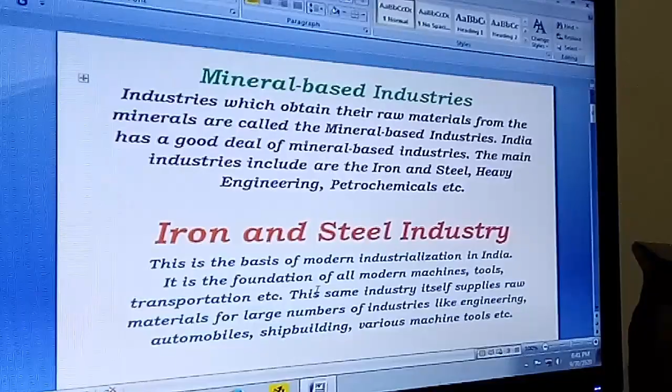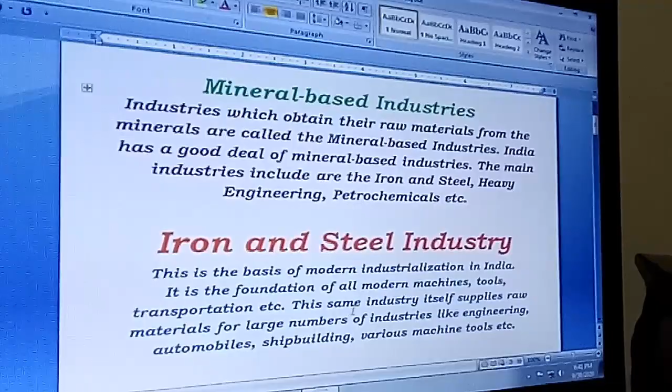This is the basis of modern industrialization in India. If India is progressing, becoming a developed rather than developing country, then iron and steel is the basis, the foundation of all modern industrialization in India. It is the foundation of all modern machines, tools, transportation, etc.

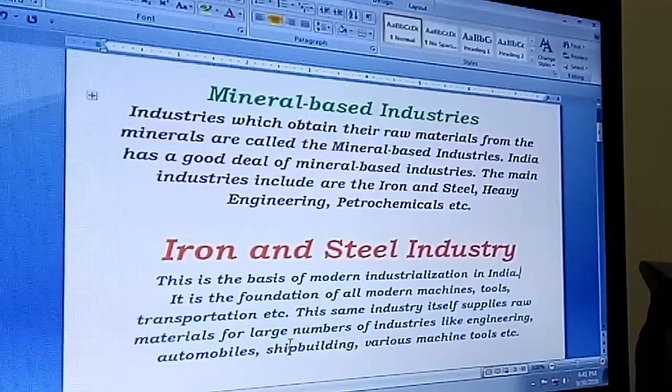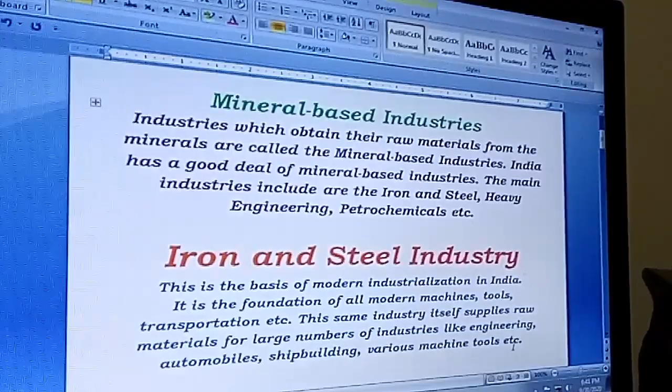The same industry supplies raw materials for large numbers of industries like engineering, automobiles, shipbuilding, various machines and tools. Iron and steel industry takes its raw material from minerals, but iron and steel itself becomes raw material or resource for so many other industries. So many industries survive because of the iron and steel industry, mainly engineering, automobiles, and shipbuilding.

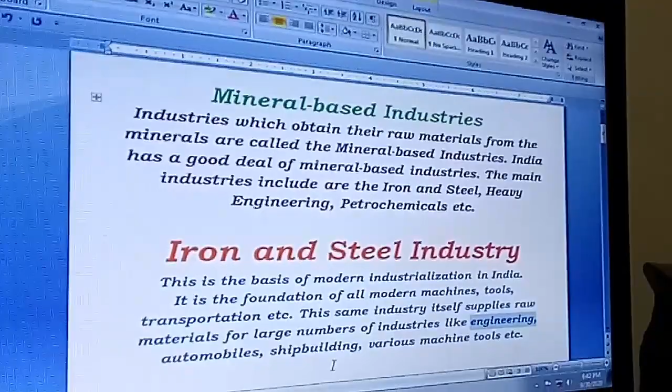See, aeroplane body is of course made from aluminium and some other materials, but various machines and tools are all made from iron and steel.

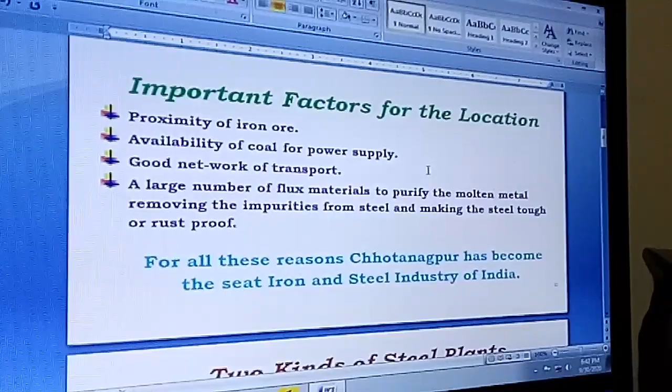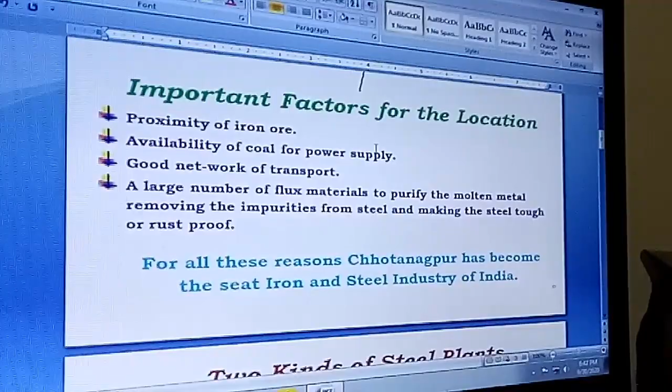Now, which are the important factors to locate an industrial place? Like proximity of iron ore - if you have to set up an iron factory or industry, what you are supposed to see first is proximity of iron ore, that means how close the iron ore is. That is the basic mineral.

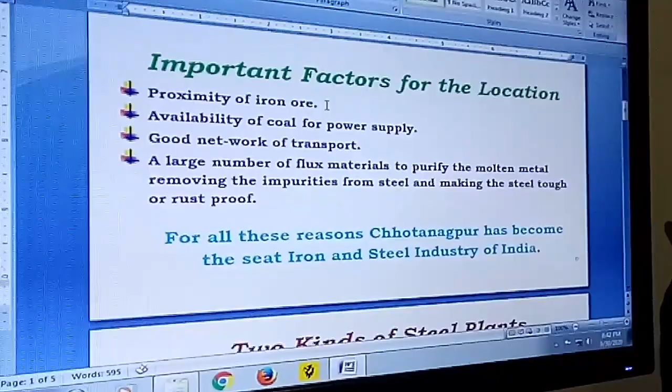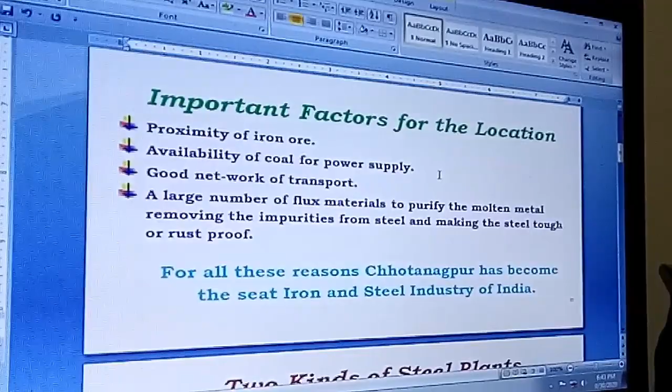Availability of coal for power supply is important, because the iron ore has to be melted. A good amount of coal is required to create the fire, the temperature to melt the iron ore. Also needed: a good network of transport and a large number of flux materials.

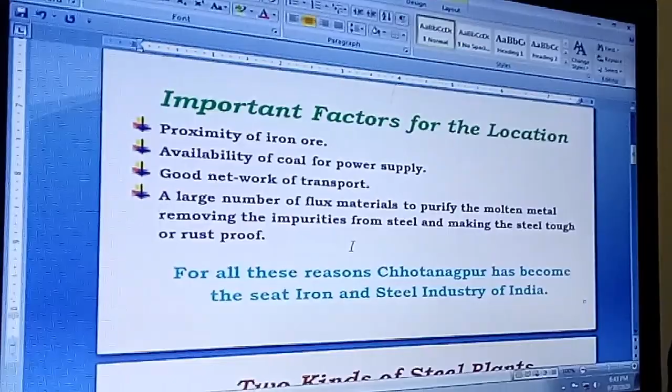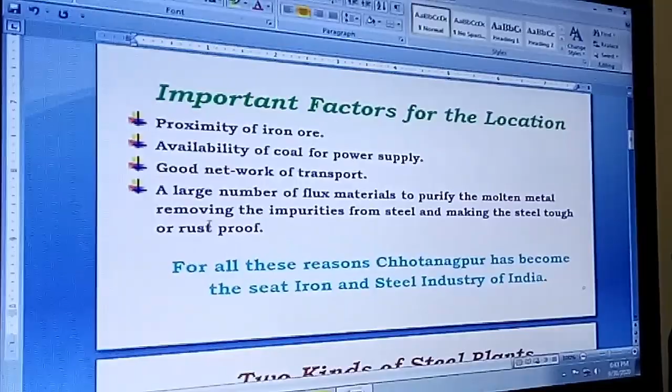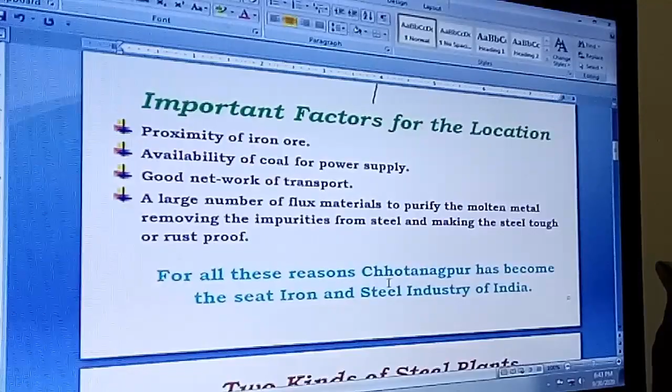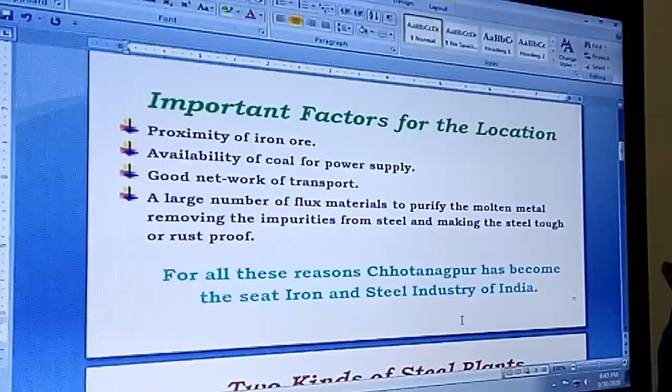In iron and steel, not just the iron ore, but so many other subordinate supportive materials are also needed, either to purify the molten metal, remove impurities from the steel, or make the steel tough or rust proof. For these reasons, in India, Chhotanagpur has become the seat of the iron and steel industry of India. It doesn't mean this is the only place, but the major, primary iron and steel industry of India is situated within the Chhotanagpur belt.

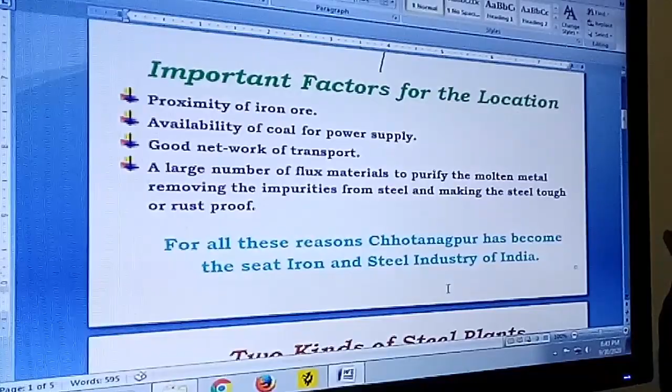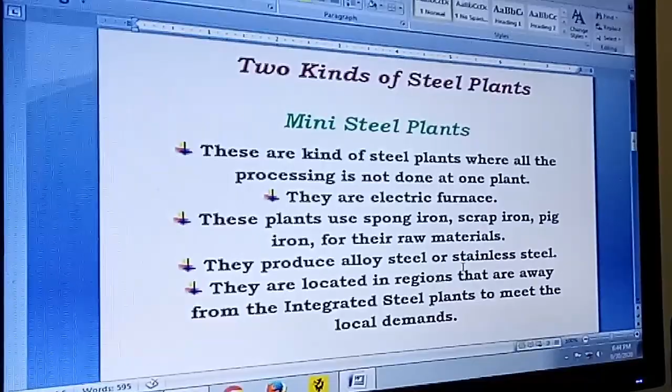Now there are two kinds of steel plants. One of them is known as the mini steel plant. What is a mini steel plant? These are steel plants where all the processing is not done under one plant or under one roof - they use an electric furnace.

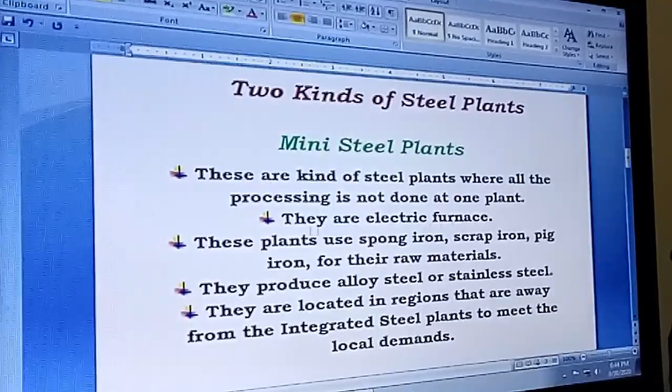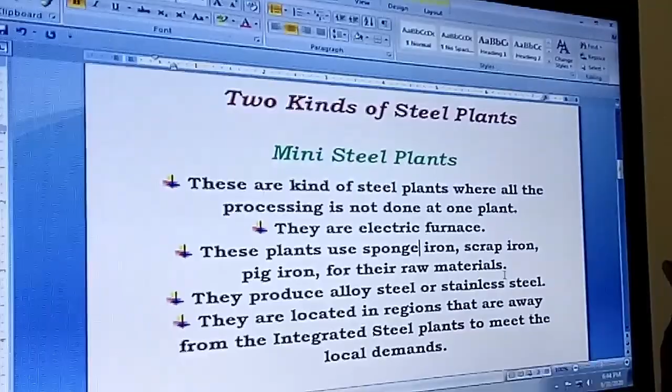These plants use sponge iron, scrap iron, pig iron as their raw materials. Remember, sponge iron, not ore. These raw materials - sponge iron, scrap iron, pig iron - are the second form, already reformed from the iron ore.

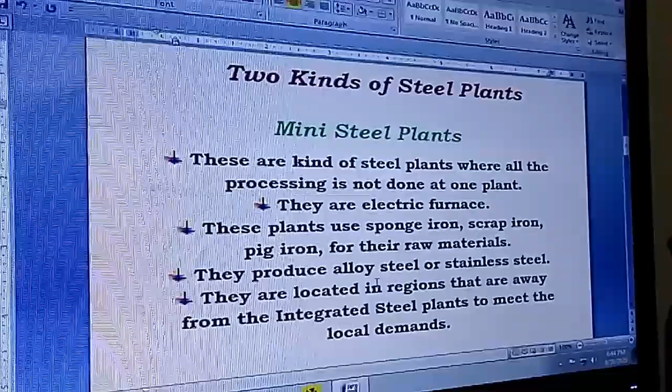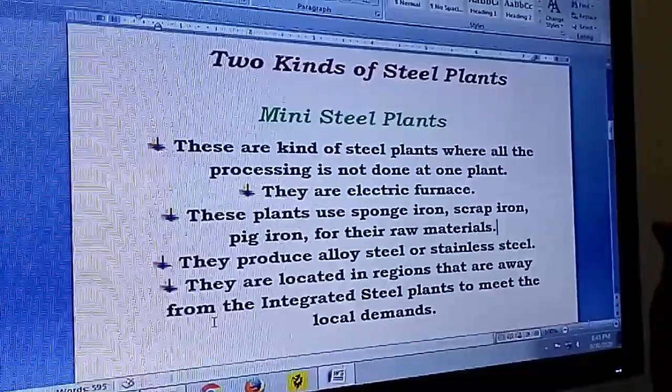They produce alloy steel or stainless steel. They are located in regions far away from the integrated steel plants. In fact there are two kinds of steel plants - mini steel plants and integrated steel plants. We will discuss the latter after this.

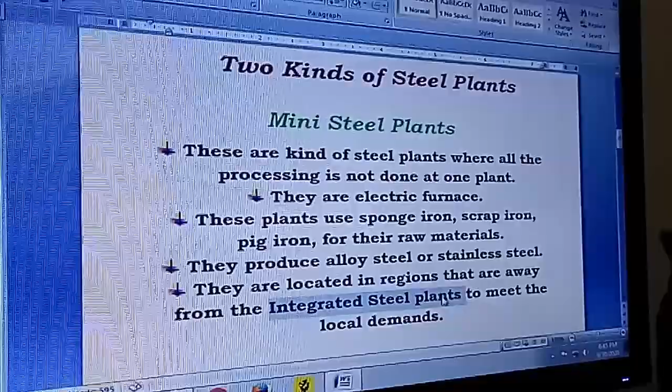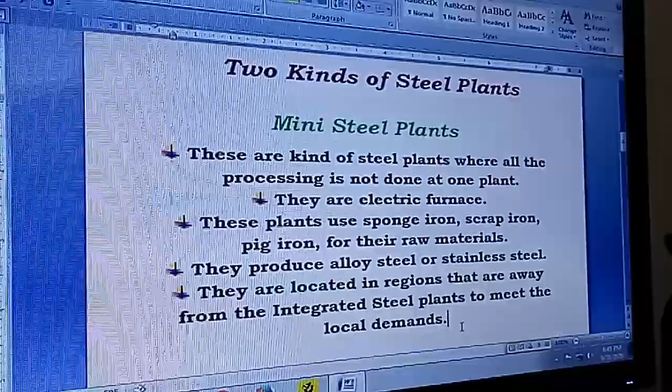To meet local demands, mini steel plants are situated in areas where the local demand will be met, like stainless steel used for vessels, etc.

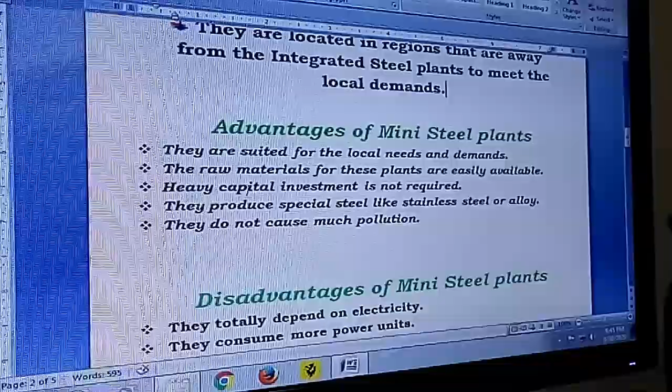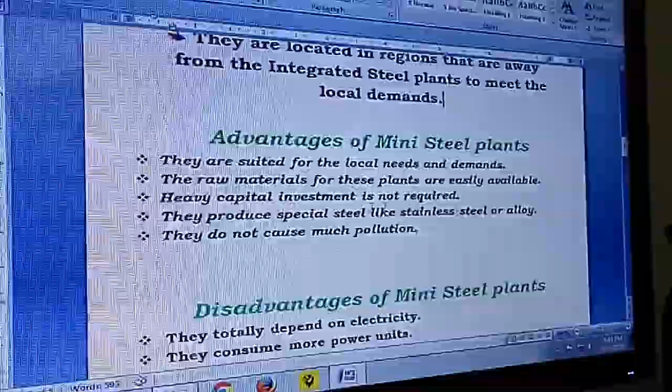Now, advantages of mini steel plants in India: they are suited for local needs and demands, the raw materials for these plants are easily available, heavy capital investment is not required, and they produce special steel like stainless steel or alloy steel.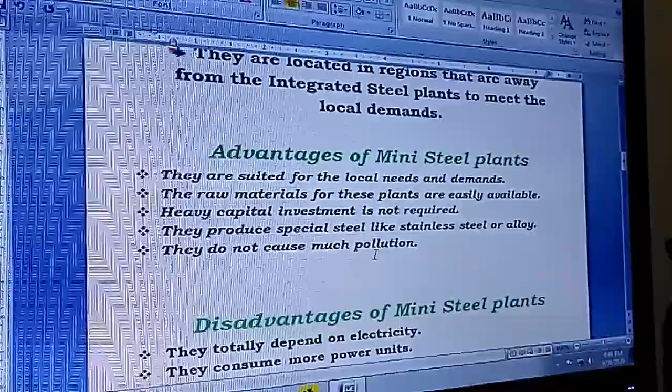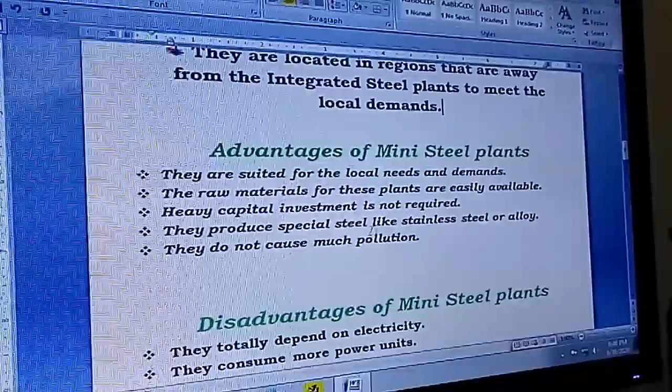They do not cause much pollution - remember the heat energy they use is from electricity, so therefore they do not cause much pollution. Besides, they use the raw material, and this is a finished product.

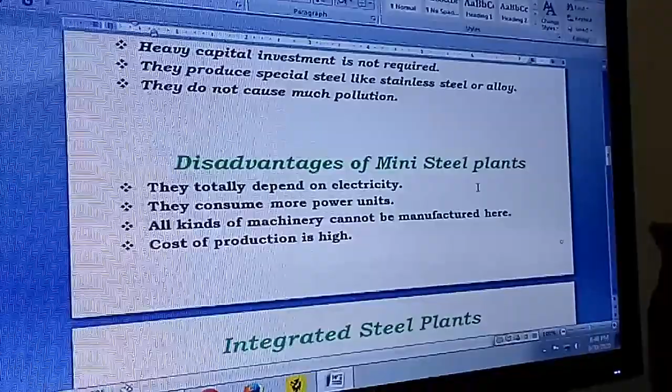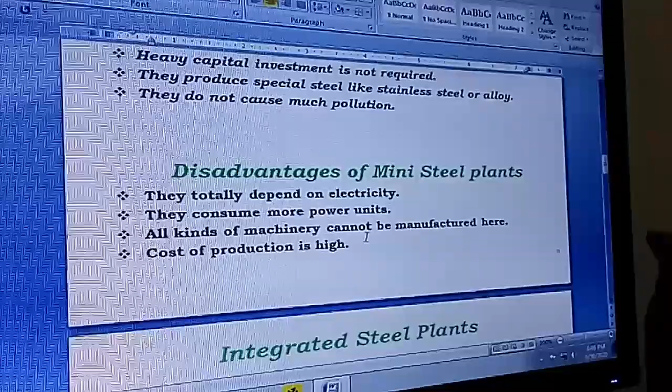Now, disadvantages of the mini steel plant: they totally depend on electricity, they consume more power units, and all kinds of machinery cannot be manufactured here since its name is mini, small. Also, cost of production is actually high.

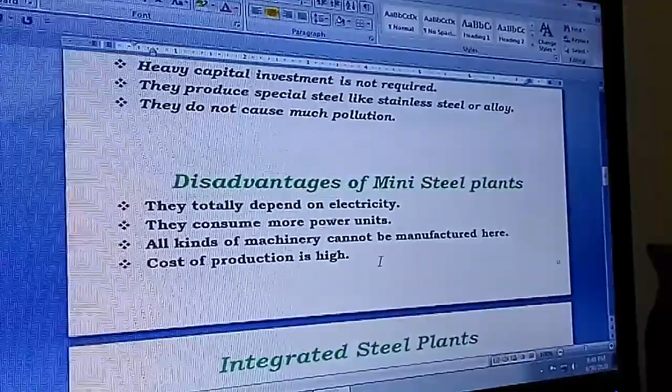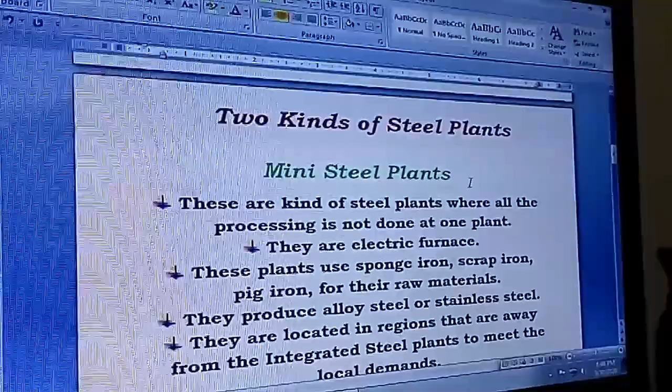The total cost of production is not high, but the cost of production per unit is quite high. Now, against these mini steel plants, there is another bigger one called the integrated steel plant. These are plants where all the processes are carried out under one complex, meaning the work goes from melting of the iron ore to shaping of the metal by rolling.

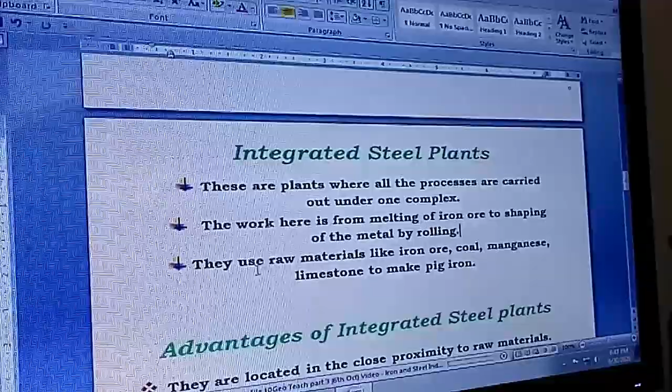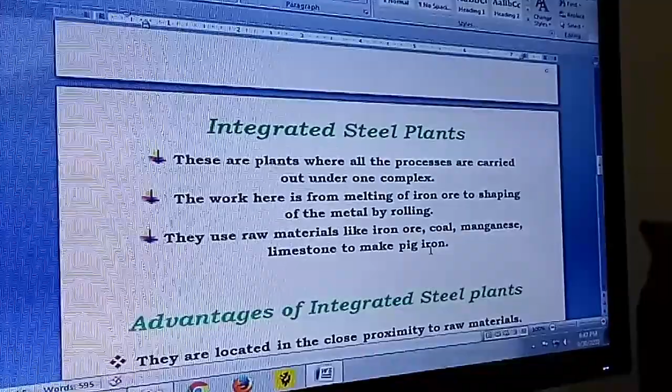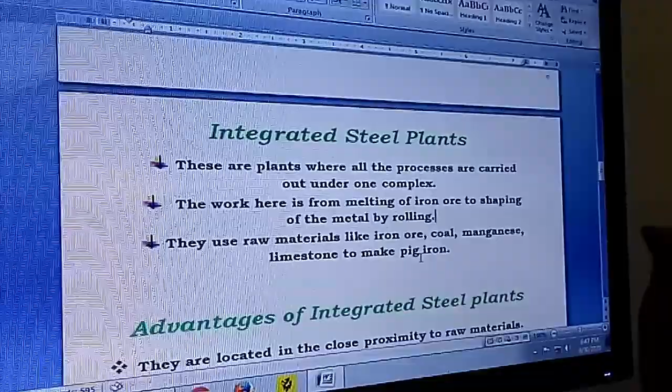From A to Z, from melting of the iron ore to the metal by rolling, they use raw materials like iron ore, coal, manganese, limestone to make pig iron, sponge iron, scrap iron, etc. They don't use the finished product.

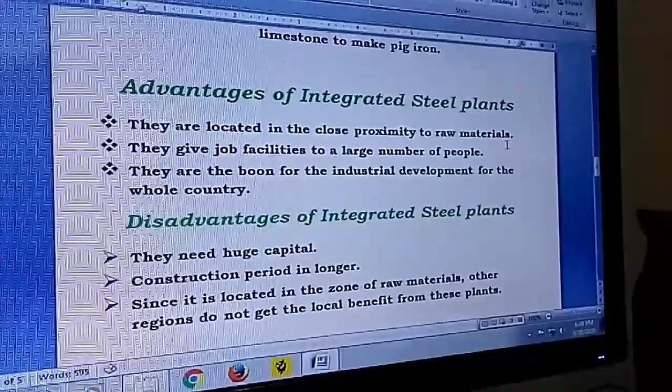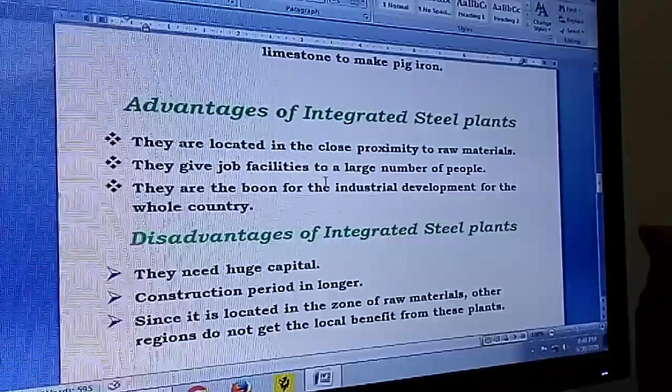Advantages of integrated steel plants: they are located in close proximity to raw materials, close to the mines of iron ore, etc. They give job facilities to a large number of people because integrated is a huge complex.

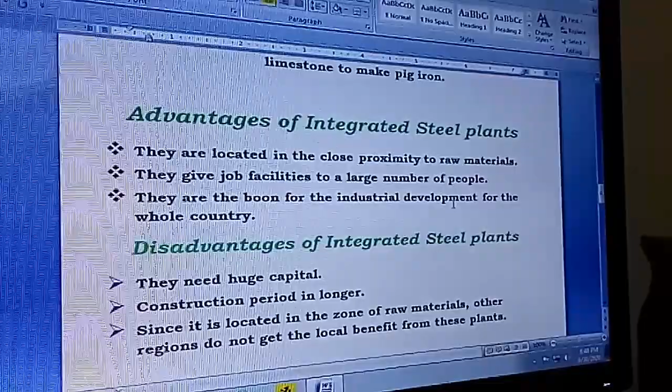They are a boon for the industrial development of the whole country. These are the backbone of the whole country. Our foreign currency earning from exports comes mainly from these integrated steel plants.

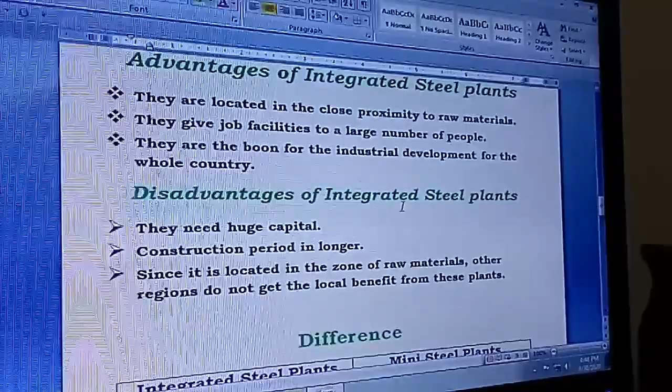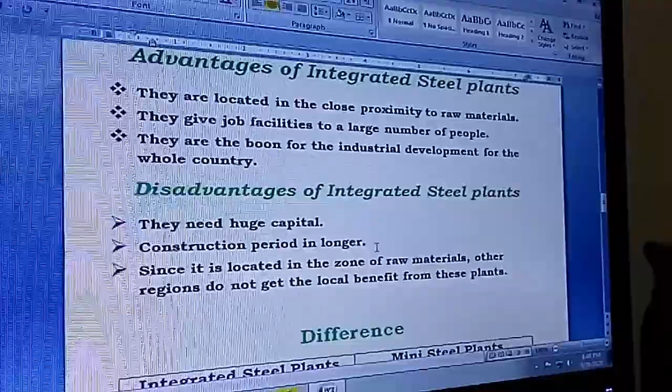Now the disadvantages: they need huge capital, you cannot have a small place or small amount of money. Construction period is longer. Since it is located in the zone of raw materials, other regions do not get the local benefit from these plants.

The difference between integrated and mini steel plants is quite often asked in exams. In the integrated steel plant, raw materials include coal, iron ore, limestone, etc. On the other side, the mini steel plant's raw materials include sponge iron, scrap iron, pig iron. In fact, integrated steel plants take iron ore, coal, limestone and convert it to pig iron, supplying the raw material for the mini steel plant.

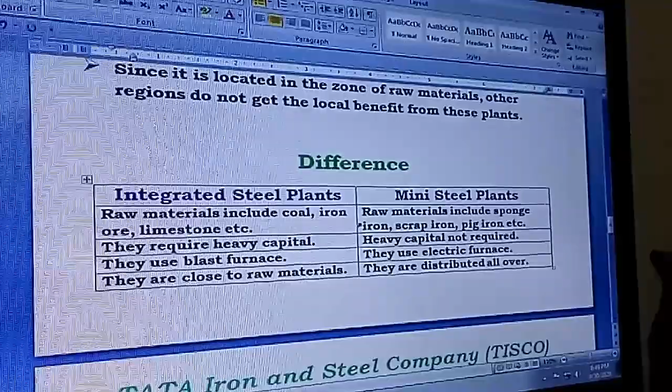Point to be noted: integrated steel plants require heavy capital since they are huge. Mini steel plants need comparatively less capital. Integrated steel plants use blast furnaces, where direct coal is used to melt the iron ore. On the other hand, mini steel plants mostly use electric furnaces.

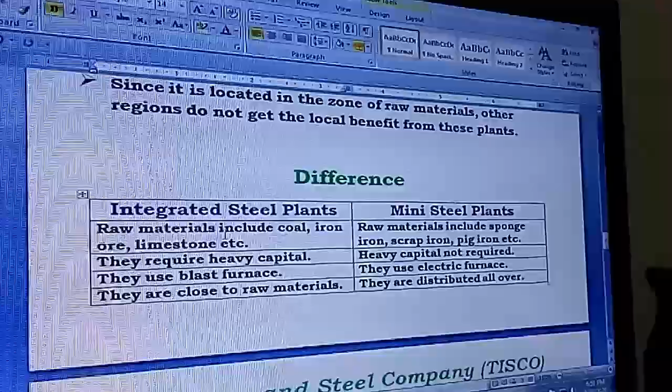In integrated steel plants, the industry is situated close to raw materials, otherwise the cost of transport would be very high. Whereas mini steel plants are distributed all over the country.

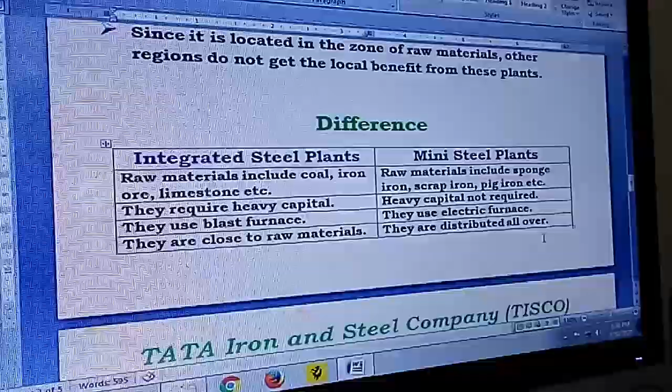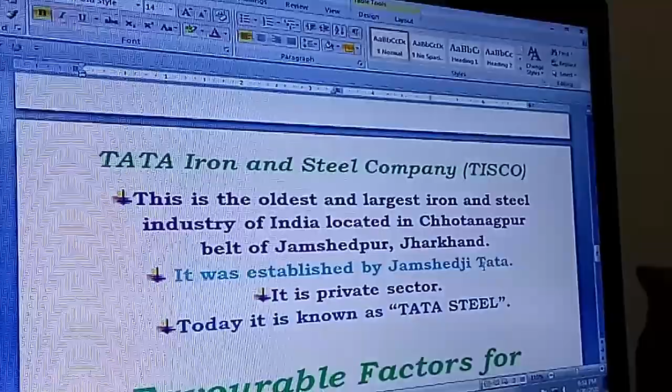Among the major steel plants of India, one is Tata Iron and Steel Company, known as TISCO, located at Jamshedpur. This is the oldest and largest iron and steel industry of India, located in the Chhotanagpur belt of Jamshedpur, Jharkhand. It was established by Jamshedji Tata, that's why it is named Tata. So the place has two names, Tata Nagar or Jamshedpur, both coming from this one name, Jamshedji Tata.

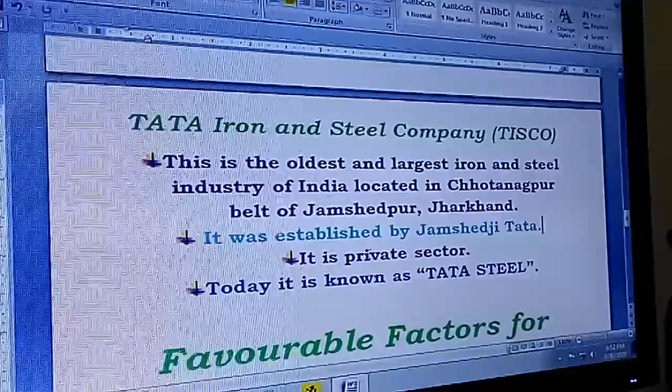Jamshedji Tata is one name, whether it's called Jamshedpur or Tata Nagar. Under the initiative of this famous man, the Tata Iron and Steel Company was established. It is a private sector company. Today it is known as Tata Steel in short form, or TISCO.

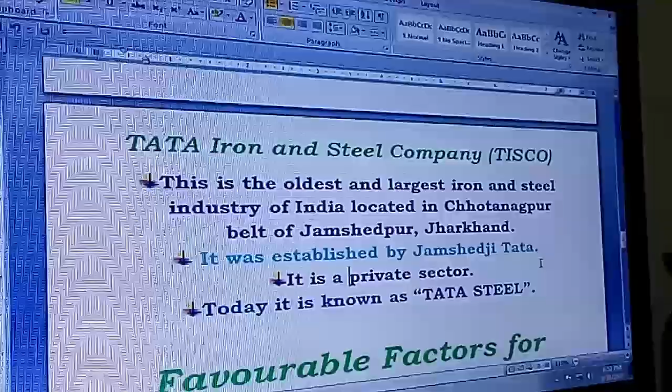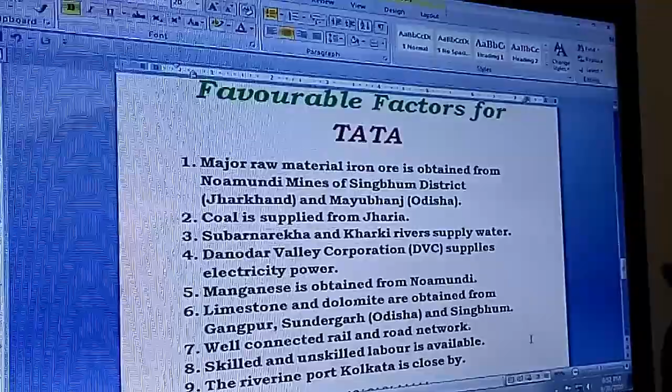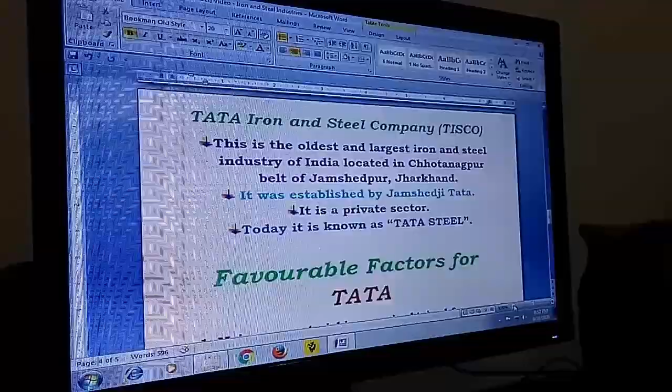Favorable factors: what helped Jamshedpur develop as Tata Nagar? Let's make it bigger so you can see. First, raw materials: the major raw material iron ore is obtained from Noamundi mines of Singhbhum district.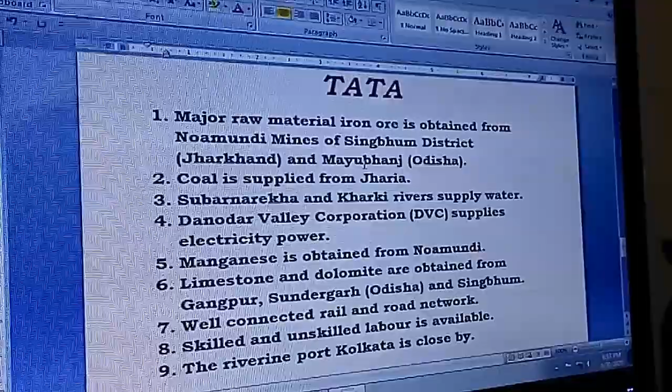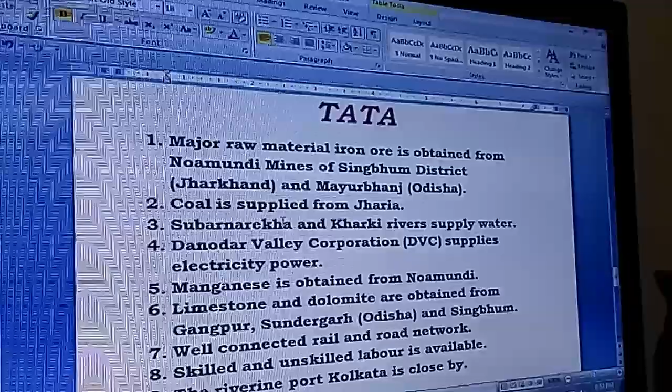Iron ore comes from Singhbhum, Jharkhand, and Mayurbhanj, Odisha. Coal is supplied from Jharia. Some of these names are quite familiar to us, Jharia, Singhbhum. Subarnarekha is the name of a river; Subarnarekha and Kharki rivers supply water.

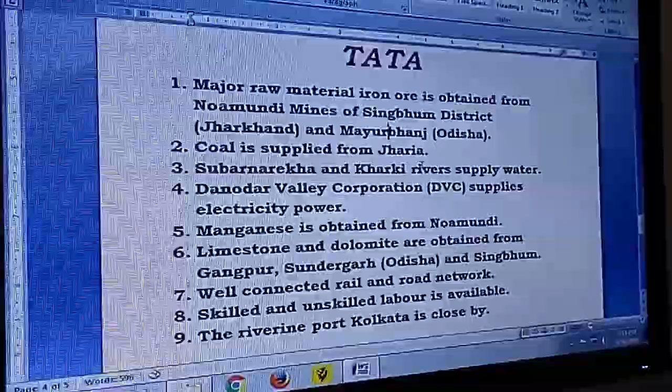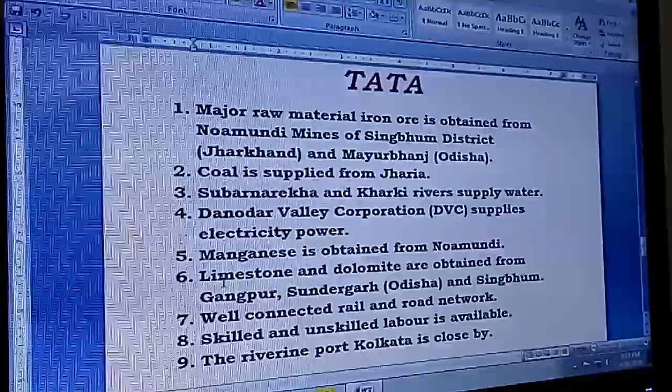Lots of water is required for washing. Damodar Valley Corporation, in short DVC, is the source of power supply, electricity. Manganese is obtained from Noamundi again. Limestone and dolomite are obtained from Gangpur, Sundargarh in Odisha, and Singhbhum in Jharkhand.

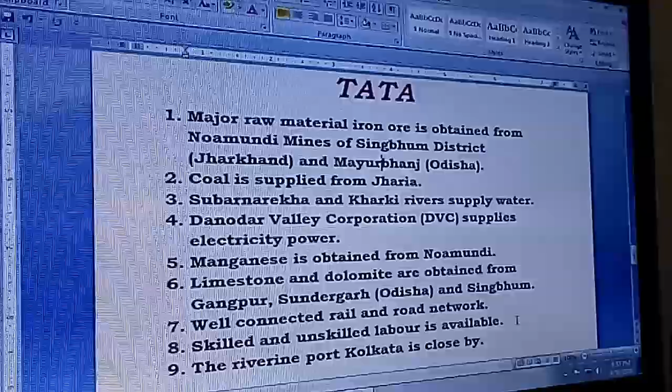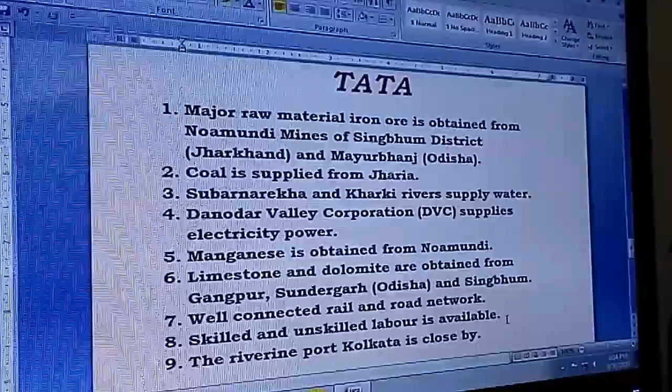A well-connected rail and road network is present here. Skilled and unskilled labor is available, skilled because of the high technology used, and unskilled because of the lots of physical manual work required. So we have both skilled and unskilled manpower. The riverine port and seaport, the riverine port Kolkata, is close by.

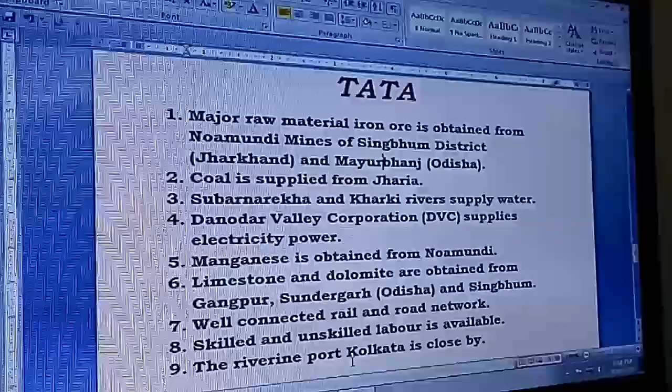So because of all these nine solid, strong reasons, Tata Nagar has become a favorable seat for the iron and steel industry of India.

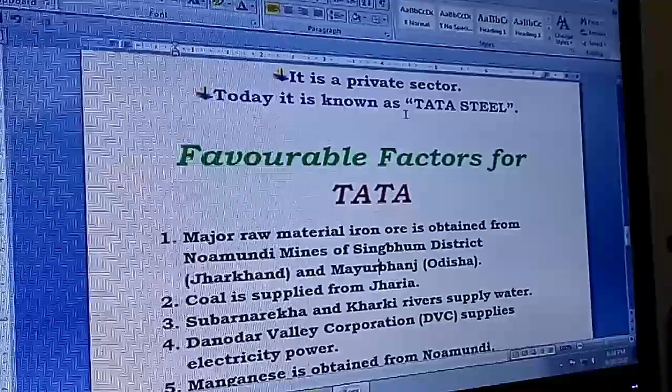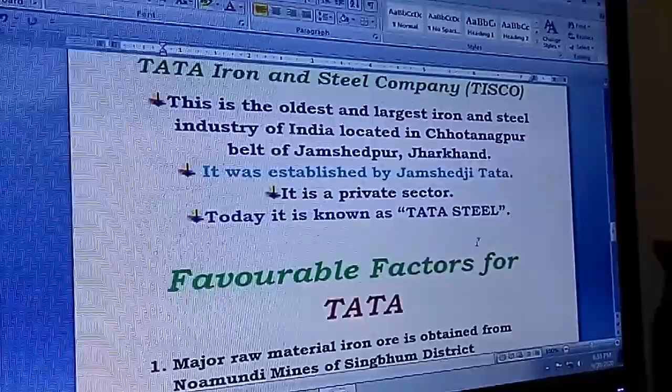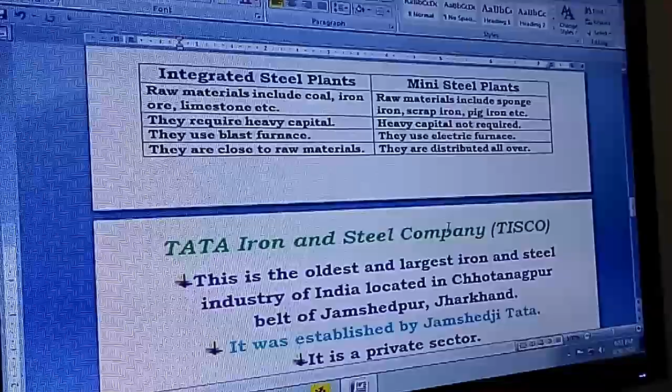We have a few more points we shall discuss in the next session, dear children. Now time is really running out, so please begin preparing yourself for the exam. From the manufacturing industry, it is understood that one 10-mark set question will surely come.

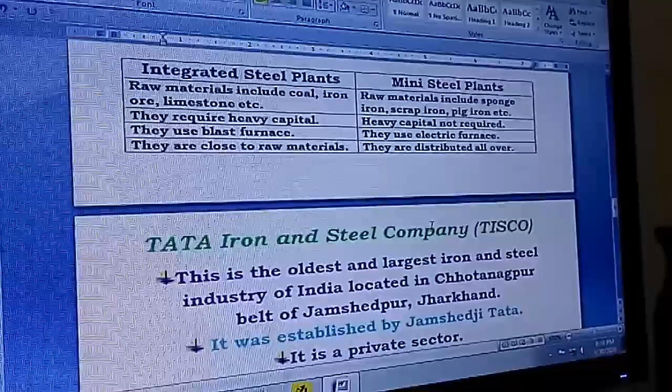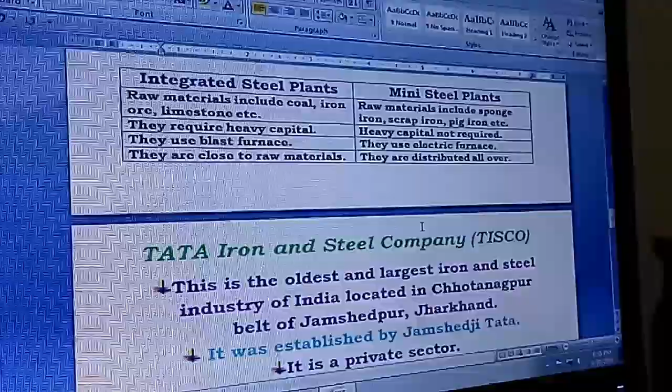Either they may combine agro-based industries with mineral-based industries, or two separate questions may come, but one question is sure to come from here. So take this chapter a little seriously, it's not difficult. In fact, geography is not so difficult. It is quite easy to score full marks in geography, provided you study and become familiar with the text.